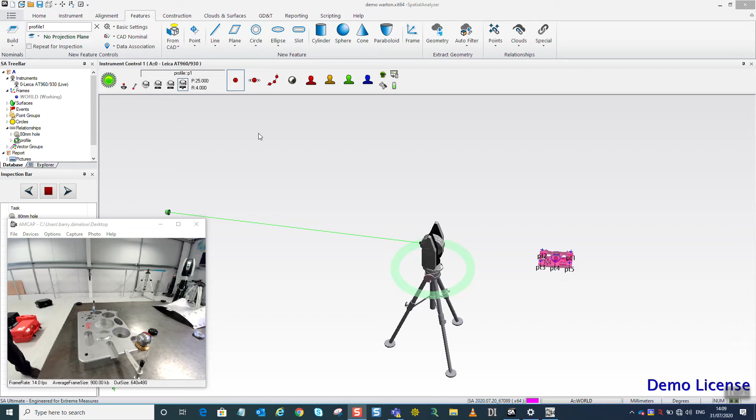Okay, so we're now connected in SpatialAnalyzer. We're using the latest release and we're looking at the ribbon bar view. So for you guys it looks slightly different, but it's kind of the more updated, fresh look for SpatialAnalyzer. So yeah, we've got a laser tracker in, we're connected, we've got some CAD, and we can see the laser tracker doesn't know where it is relative to the CAD model as of yet.

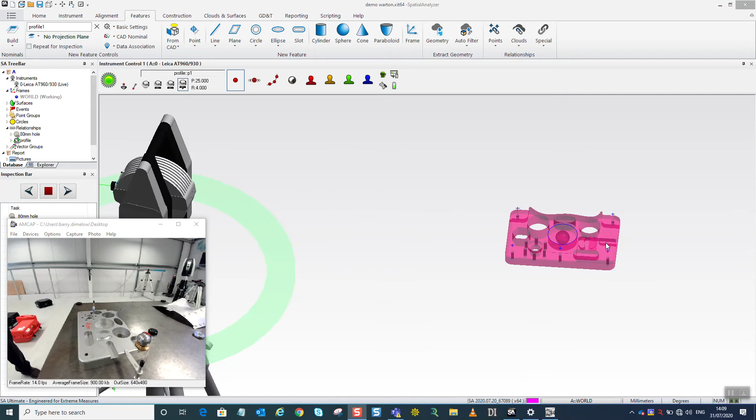So we're going to align to the CAD using the reflector we can see there in the video view and the accessory underneath, and we've got some points on the model in a similar place. We've got P1, P2. So the idea is we locate the instrument via a right click, and there's an option to measure nominal points. So we're going to do a best fit alignment by measuring the nominal points, similar measured points in the same location, and then overlay them.

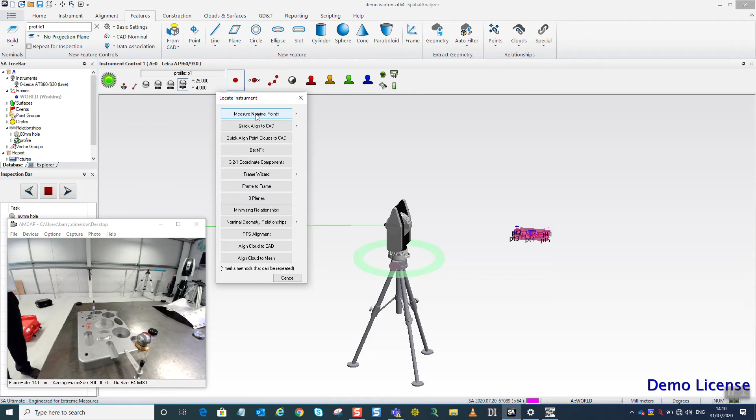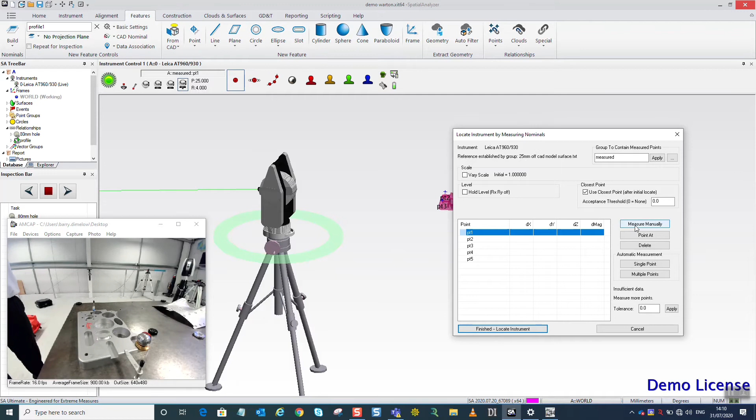That's the principle. So the nominals we're going to measure are these, and then we get the window up. Just move that out of the way so we can see what's going on. We're going to go into a group called Locate Instrument Measure 1. Maybe we call this just measured. Apply. Okay, so we're in number 1 there, so we can measure. To trigger the measurement there.

Okay, if we scroll back on the mouse, you can see the laser tracker has no idea where it is as of yet. Just as a visual aid, whilst we're using the laser tracker in 3D mode to measure 3D points, we're using the 1.5" reflector which comes with the tracker, and we're using what we call a pin nest, which is something you're probably familiar with, but it's a nest with 3 land items that the reflector snaps into so that it's always in the same orientation, and then there's a shank on the bottom which fits rather nicely into each of the holes. So these are sized and made to suit whichever feature that you're measuring.

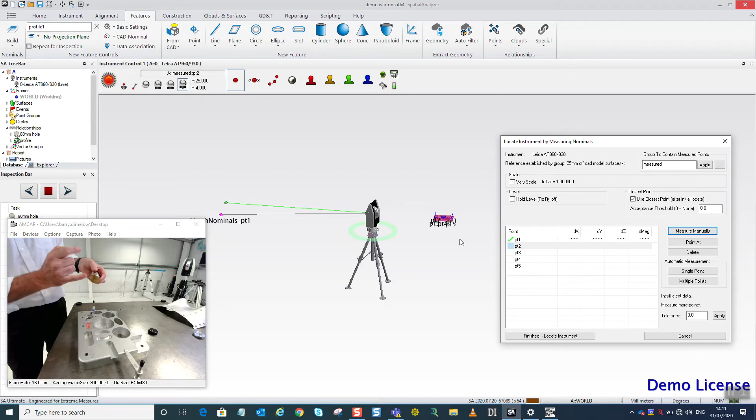So when the reflector's in the nest, the centre of the reflector is 25mm above the base of the reflector, and in the software you can see that each of those nominal points are actually 25mm off the surface as well. So this is a very traditional method of bucking in or aligning the tracker to a part, something you're probably familiar with, but we thought we would cover anyway.

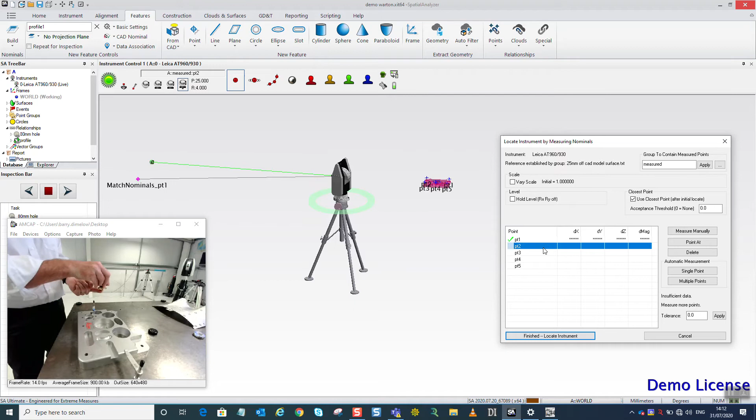So when I turn the reflector around and face the tracker it will lock on, and you'll see a green light on the tracker itself over here in the image. So that means we're locked on and ready to go. So I'm now just going to place the pin of the pin nest into hole number 2, drop it down, and we can trigger the second point. Okay, go to number 3.

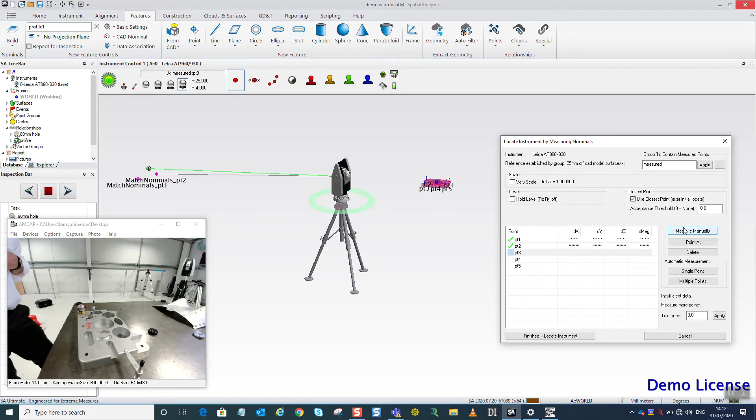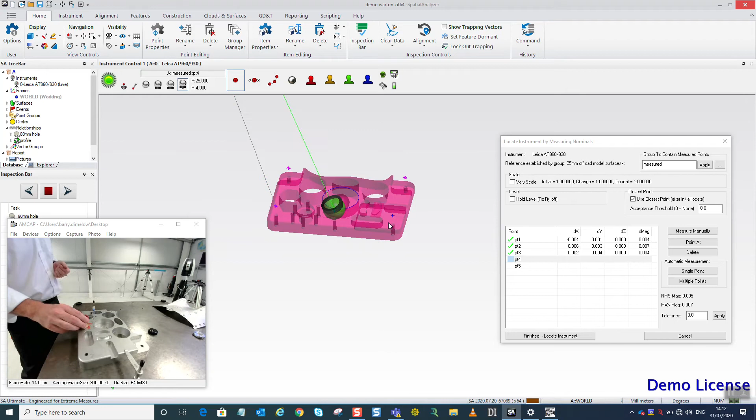So we're using a 960, but what we're seeing now on the screen would be exactly the same if it was a 930. Yeah, so the difference really between a 930 and a 960 are the numbers in the middle, so the 3 and the 6. The 3 in the 930 signifies 3D measurement being an XYZ coordinate from the centre of the reflector. The 6D tracker, where we can use the T-probe and the T-scan, refers to the 6DOF technology in the actual T-probe and T-scan that allows us to hold those items at any orientation and still take measurements. And we'll explain a bit more about that when we use those instruments. Okay. Moving to number 5.

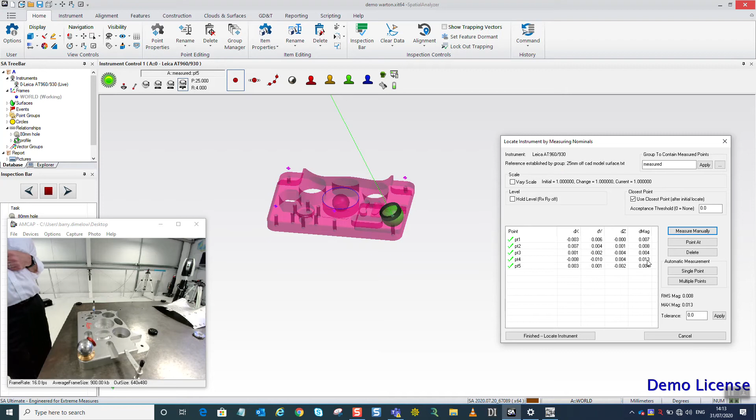Okay, so we've measured everything and we're seeing an XYZ deviation per point and also a magnitude. So they're the results of the alignment. So we've got 7, 8, 4, 13 and 4 microns. So we can do finish locate instrument. And obviously if we zoom out now, we can see we're aligned. So once we got to the 3rd point, you may have noticed that the instrument kind of located to the part. So that's why after 3, it's trying to fit the data as we're going along.

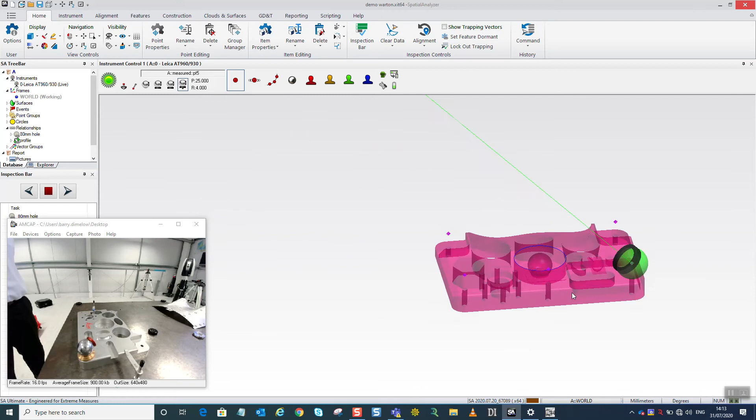Okay, just in regards to a watch window, let's just right click on the CAD and get some real feedback. So we've got the watch window.

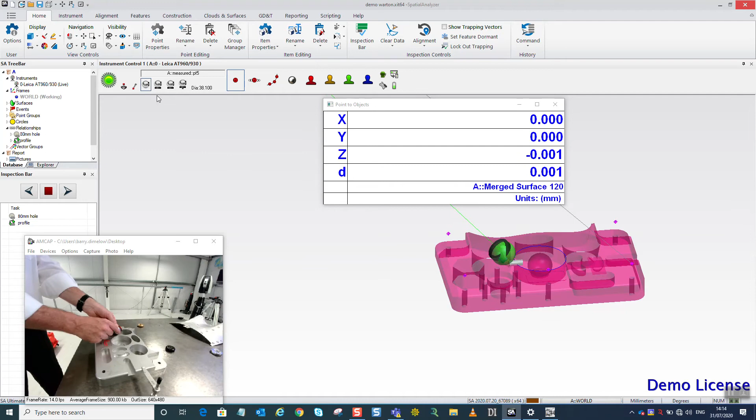We'll just switch to the reflector only mode. Whenever John puts the ball on the surface, you can see we're aligned to within a few microns based on the alignment, the residuals of the best fit alignment. So yeah, just a small number of microns wherever I put this reflector on the surface of the CAD, and it's extracting the nominal position from the CAD data and giving us a deviation. So yeah, it's safe to say we're very well aligned.

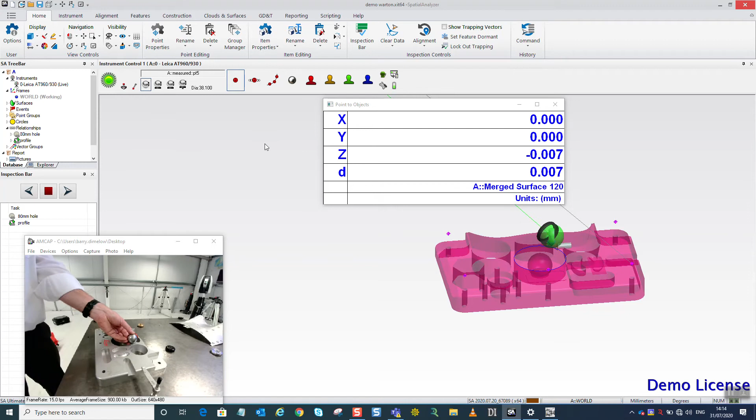The system and the software is taking into account the offset between the surface of the CAD and the centre of the reflector. The centre of the reflector is always where we actually get the measurement result. Just something that you may have noticed, here's a half-inch reflector in comparison to a 1.5-inch reflector. So these are available if your parts are very tight and you can't get in there, you can use a half-inch reflector. We actually do a 7/8-inch reflector, which is kind of somewhere in between the two. But 1.5 inches, they're really nice and handy to use and easy to hold, so we'll continue off with this one. But there's all sorts of different reflectors you can use.

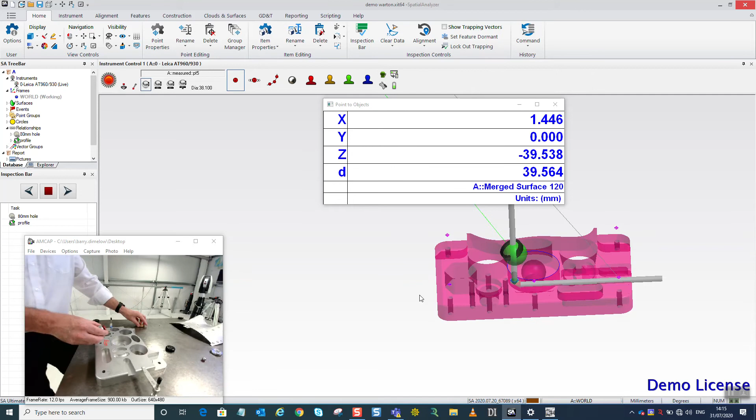Okay, up front I've created a couple of features we're going to measure. So we're going to measure this 80mm hole in the centre. And we haven't got a T-probe because we're using the 930. That's kind of what we're showing here. But we can use a pin nest. So we'll flip back to the pin nest and we can measure this hole. So I'm going to start the inspection off. We can see it's highlighted on the CAD. And if John had a remote control, he could trigger it himself or using stable points.

Okay, so we've got the first measurement. It's counting up. You can see on the corner of the graphics there, we got number 1. We'll press measure again. I actually moved the nest then whilst we were taking the point. It rocked a little bit, so can we check to see what the RMS was there, or is it worth deleting that point? Yeah, so we can open the point group up, we can double click the point.

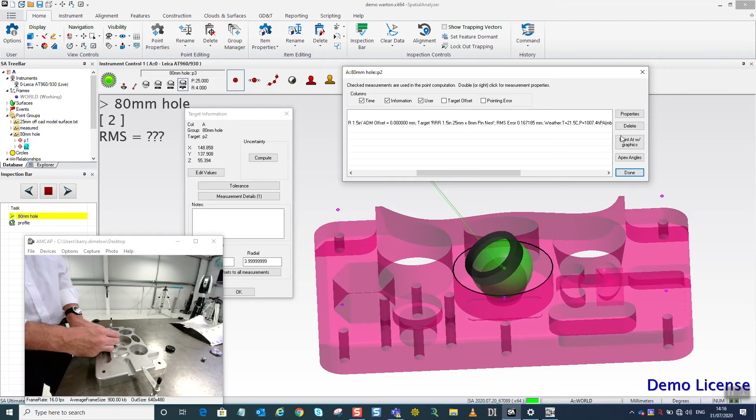If we go to measurement details, there's information. So we've got a full traceability chain of the measurement, and we've got the RMS error of 0.167, so it's a bit high. Yeah, it moved just a slight bit whilst I was taking the point, so that's a good point. So it's good to see you've got full traceability with Spatial Analyzer. So we're going to delete P2, and we can also set a threshold for that to reject as well. Okay, that's better. Next one.

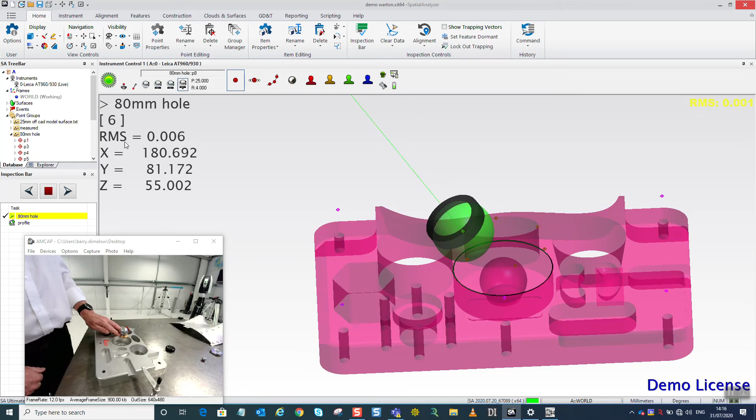What am I going to do? We'll do 6. We're going to do 6 measurements to make the circle. 3 is the bare minimum. Having some redundancy is good. We get some RMS, like a quality factor of the circle. Okay, we'll stop that. We can stop trapping that now. Okay.

So I right-clicked on the relationship then, or the feature we've just measured, and we can get graphical feedback straight away. So we've got a nominal, measured, and a deviation of 17 microns, and we've got the position. So by aligning to the CAD, measuring with a pin nest, we've established the size and the position of the hole. So that's the same for any type of standard geometry, so it could be a hole or a slot or an ellipse or a cylinder. So any kind of prismatic geometry you can measure with the reflector itself or with the aid of a pin nest or some tooling.

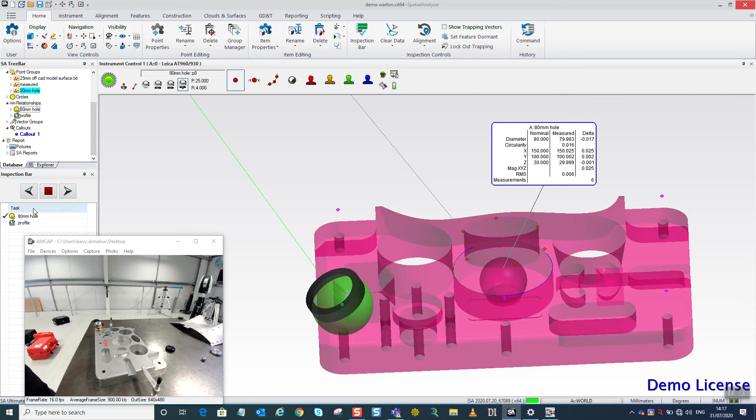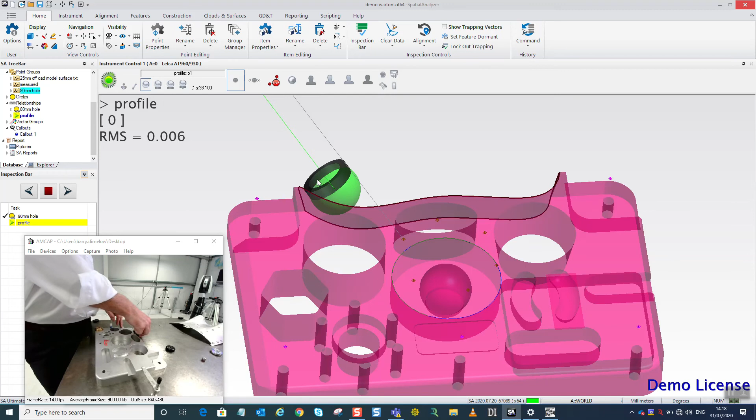Okay, so we'll jump on to the next feature, and it's this front profile, and we're going to use the reflector to scan the surface. So we'll just switch to reflector. And so we're going to use spatial scan mode, which is the icon where you can see the dots that join together. So we'll click that. Okay, it's asking us to move the reflector to the surface, which John is doing. And now if he runs it on the surface, we can see we're taking measurements, and we've got it set up so as we're measuring, we're getting some blotches appear on the screen.

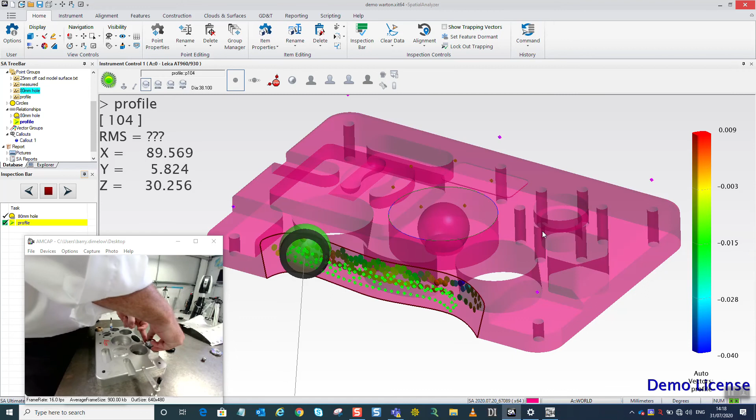Okay, and we get the spread of the dispersion in the colour bar on the right hand side. So with the AT930 and the AT960 delivering data at 1000 Hertz, if I wanted to, I could go a lot quicker, but I'm just ensuring that I'm holding the reflector on the surface of the profile we want to measure. It will take shots or hits in fresh air if I was to actually move the reflector off the surface, so you've got to be quite careful you keep the reflector in contact, but the tracker is capable of capturing that data way quicker than I'm capable of moving my arm, really.

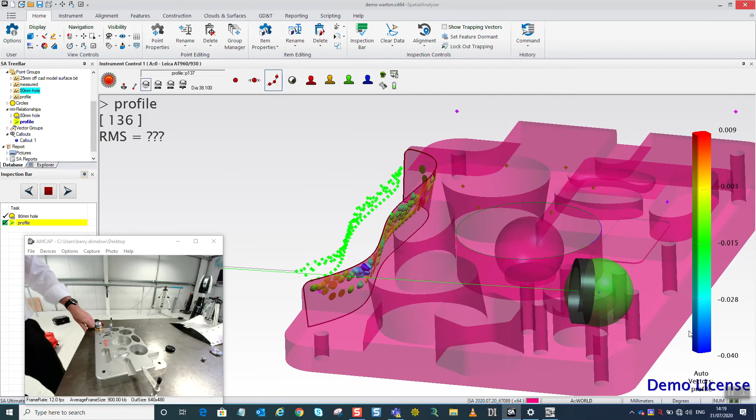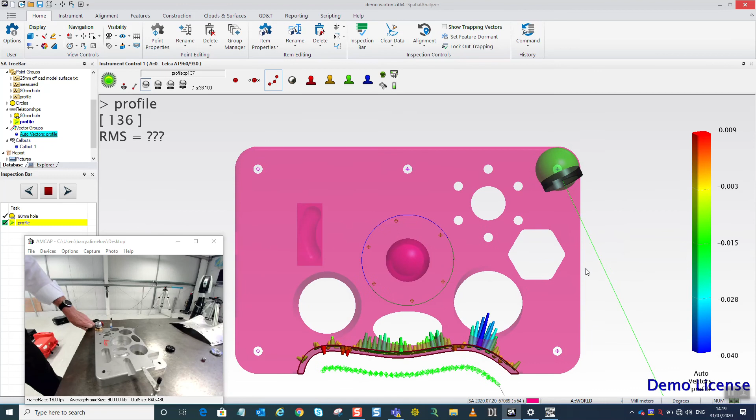Yeah. So we can see the deviations there. So we've got 9 microns positive, and then we've got -40 in a negative, which means there's too much material off that face. We can make these vectors longer, so we'll just make them a bit longer so we can get an understanding. Close that off. So maybe we'll do top view, drag a box round so we can see, show the call out as well. So we've got a nice view, we've got the deviations on the surface face, and we can make a quick report out of that if required.

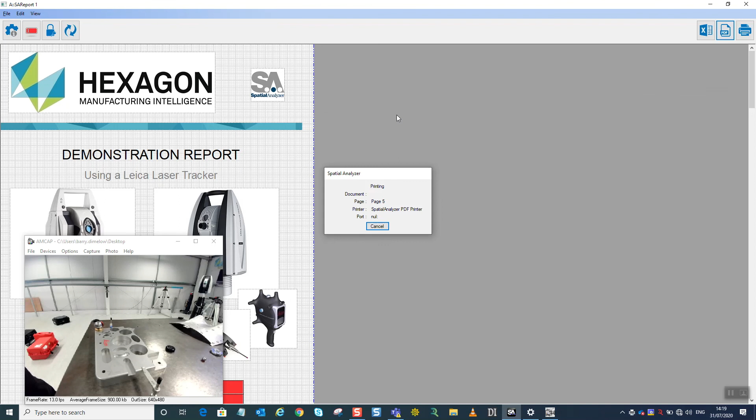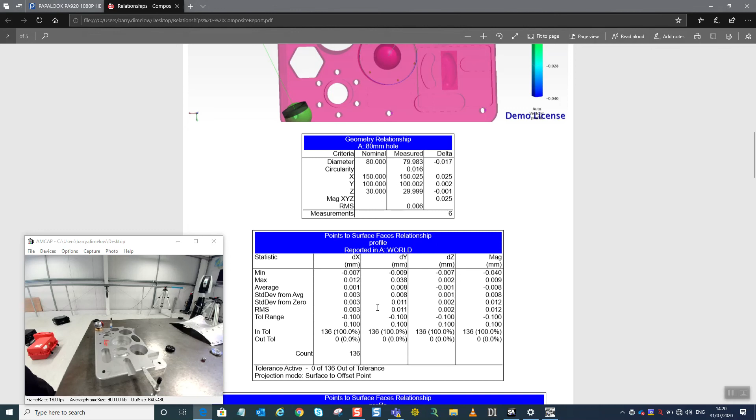So if we right click on relationships, we can make a PDF of just what we've measured. So put that on the desktop. Okay, so there's our screen grab, and then we get some information on the hole and also the surface profile. So we did 136 measurements, and they were all within the plus or minus 0.1 that we kind of specified. We'll just close the report off.

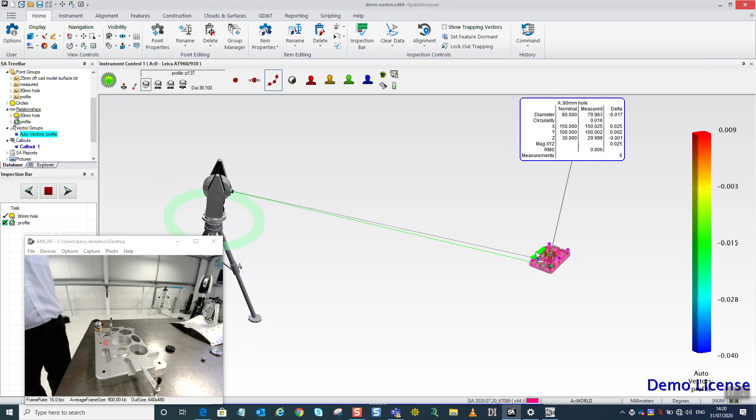Yeah, so that's kind of what we wanted to show you with the AT960. I think there's one more really important feature that is standard on all of the Leica trackers that we offer at the moment, called Power Lock. It's a function that was introduced one previous generation ago, but I don't think those systems exist at BAE, so you might not have seen this. So Power Lock is basically a function whereby the laser tracker over in the corner of the screen there is locked onto the reflector with the laser beam.

I'm not sure if you'll be able to see this, but if I put my hand in front of the reflector, you'll see on the software the indication goes red in the top left corner to show that we're no longer locked onto the reflector, and you can see a red and a blue light flashing on the actual tracker head itself. So at the moment the tracker is searching for the reflector, and what I can actually do is move the reflector, but if I take my hand away, the tracker immediately sees where the reflector is, moves slightly and locks back on, and we go green almost immediately. So you can do this in mid-air, you can even be moving it, so you can block the beam as many times as you like, move everything around. As soon as the tracker can see the reflector, it locks back on and goes green.

This is an absolute godsend on the shop floor. You've got people driving past with forklifts, cranes going past. If you have to climb up some access steps to get to the top of the jig, for example, you just introduce the reflector into the scene when you get to where you need to do your measurements, and the tracker will immediately lock on. So again, really great for health and safety, really good for productivity.

In the older days, if you broke the beam, not only did you have to kind of find it yourself and then move the reflector to the beam, it sometimes took a few moments for everything to lock back on. So Power Lock is absolutely incredible, and you know, the younger generation kind of can't live without it because it's all they've ever had, and the older generation of operators can't believe what they're seeing when they actually see it. It's a serious improvement, so it's really good for productivity.